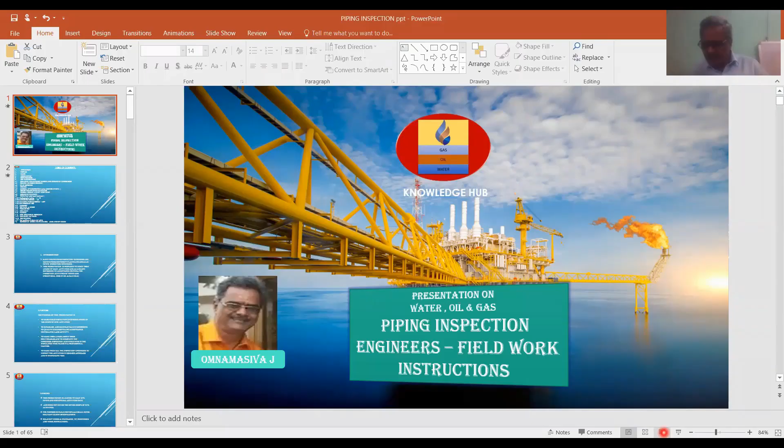This presentation is on piping inspection engineers' fieldwork instructions. It is made with a lot of things which are most useful in day-to-day field activities. This covers B31.3 process piping and other codes also. Okay my friend, let's go. Hope it is useful.

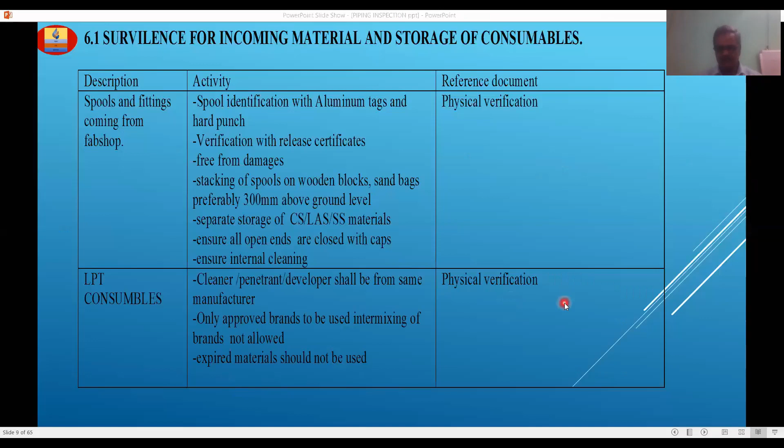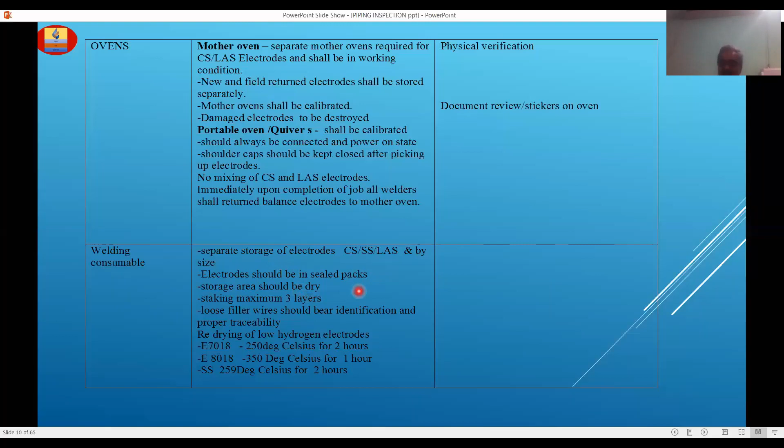Welding consumables. Separate storage of electrodes - carbon steel, stainless steel, low alloy steel - and by different sizes: 2.5, 3.15, 4mm, 5mm, like that. Electrodes should be in sealed packs, not loose. Storage area should be dry. Stacking maximum 3 layers - you cannot keep many electrodes in the mother oven at a time, only 3 layers are acceptable.

Loose filler wires should bear identification and proper traceability. There are filler wires used in TIG welding for stainless steel and carbon steel. These filler wires should have identification and proper traceability - it should be identified and in traceable condition.

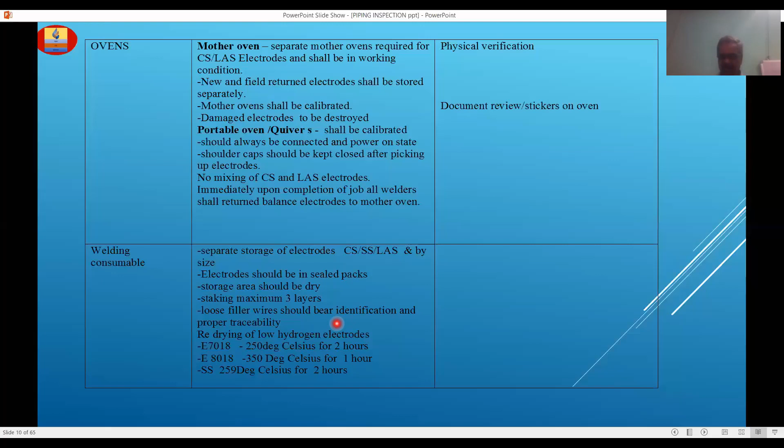Redrying of electrodes, low hydrogen electrodes: 7018 at 250 degrees Celsius for 2 hours, or 8018 at 350 degrees Celsius for 1 hour. Remember this, and you should not exceed these temperatures and times. Stainless steel: 250 degrees Celsius for 2 hours. This is for electrodes, and this is also a physical check you have to do.

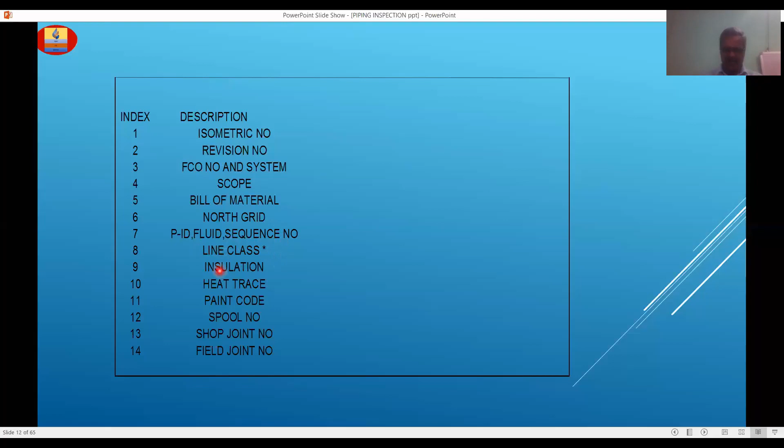Don't think that every drawing will have numbers 1 through 14 mentioned - not like that. Only for your immediate understanding: where I mentioned 1, the isometric number will be there; where I mentioned 2, revision number - isometric revision 0, 1, 2, 3, like this. Then FCO number, scope, bill of materials, material type, north grid - showing north grid 30 degrees or true north. Then P&ID fluid - which fluid it is, P&ID number, sequence number, line class number, whether insulation is required or not, heat tracing required or not, paint code - which paint is applicable, spool number - which spool it is, shop joint number, field joint number. These are the things available in the drawing where I mentioned them - this is north grid, this is field joint, spool number 12, like this.

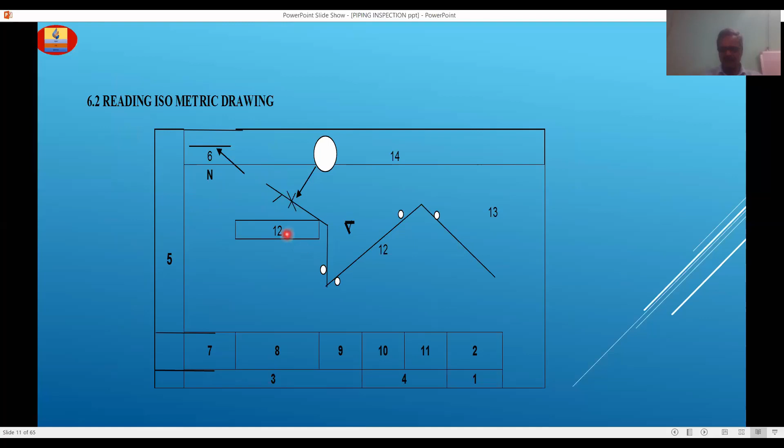Third is rating: 150 class, 300 class, 600, whichever the rating. Fourth, corrosion allowance: 2 for 0.062, 4 for 0.125, 6 for 0.187, 8 for 0.25 inches. Fifth letter, construction type: E for butt weld, RF for socket weld, raised face socket welds. Sixth, sequence number A through Z, 1 through 9. Example: EC12EA - Bechtel 6th spec designation character logic - these are the 6 digits, like 1, 2, 3, 4, 5, 6.